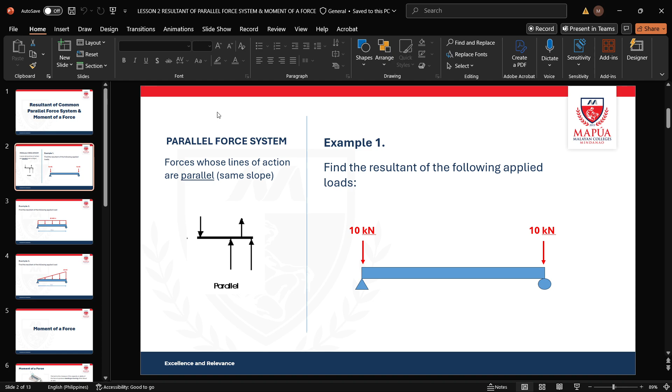So let's proceed to example 1: we need to find the resultant of the following applied loads. This is easy. If you have 10 kilonewtons here and 10 kilonewtons there, what's the combination of the two? You have 10 plus 10 equals 20 kilonewtons. Since it's symmetrical, the resultant will be located at the middle of the beam, that is 20 kilonewtons. This will be our final answer. Easy, right?

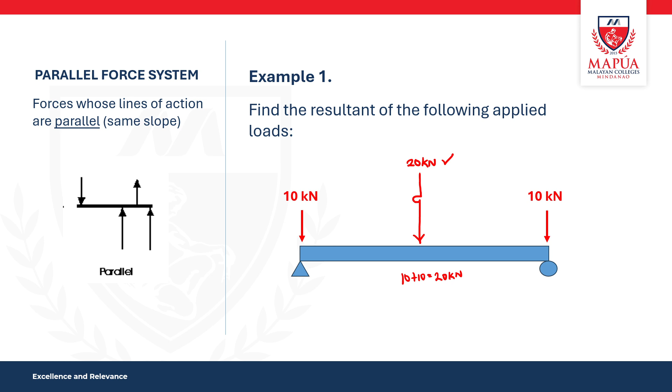So next, what if it's not a point load? What if it's a uniformly distributed load? This is what we call uniformly distributed load.

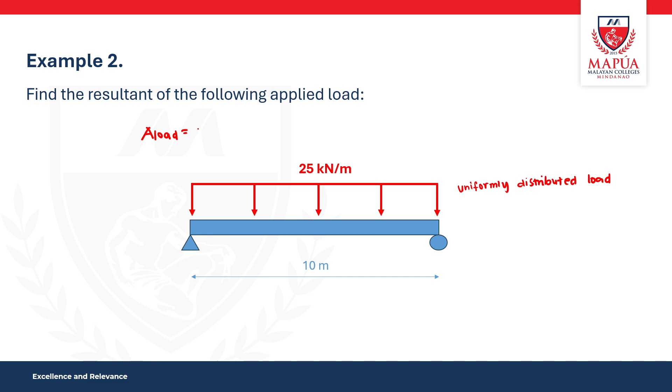So when it's a uniformly distributed load, finding the resultant is just the area of your load. What shape is this? A rectangle. So the area of that load would be the height times the length. Let's call this height, and this the length.

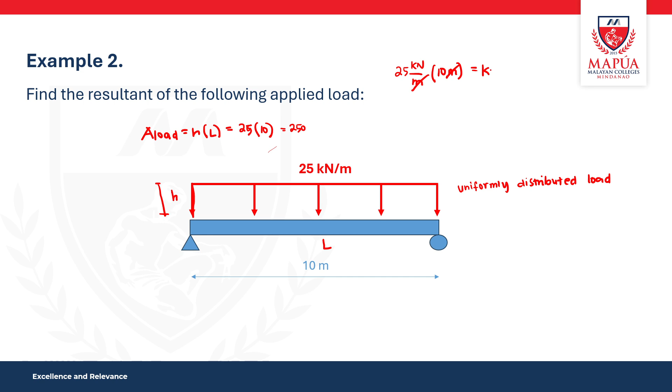So your height is 25 kilonewtons per meter, and the length is 10 meters. So that would be 25 times 10, this would be 250. What's our unit? In identifying the unit, remember that 25 is in kilonewton per meter, and 10 is in meter. Therefore the meter cancels, leaving kilonewton.

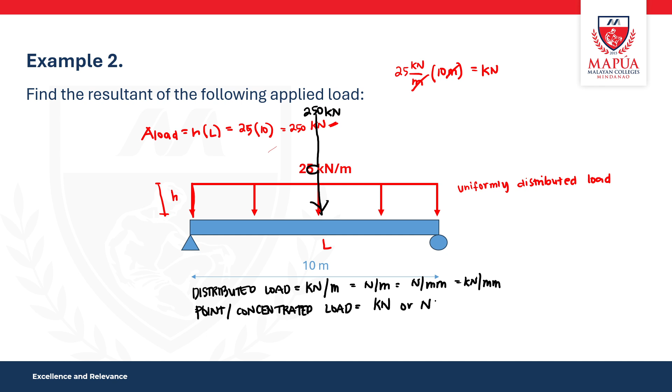the unit is in kN per meter. It can also be in newton per meter or newton per mm or kN per mm, as long as it follows that format. Then for point load, or what we call concentrated load, the units are in kilonewtons or newtons. So let's proceed to the next example.

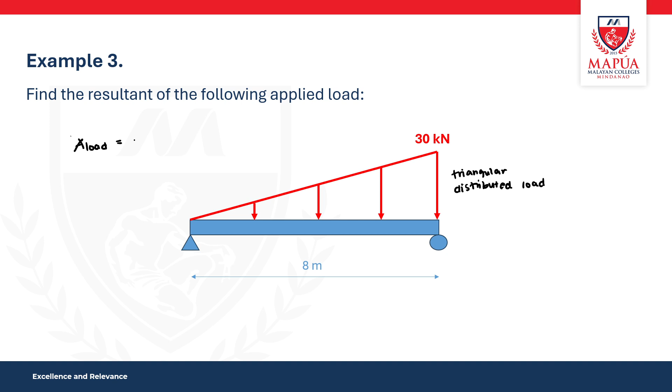You solve for the area of your load. So we will solve for the area of the load. What shape is this? Triangle, right? What's the formula for the area of a triangle? 1/2 base times height.

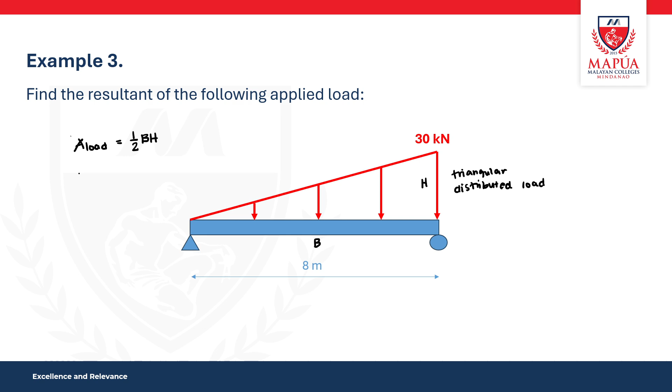In this case, this will be our base, and this will be our height. So the resultant is the area of the load. This would be 1/2 times base of 8 meters times height of 30 kilonewtons per meter. So the meter cancels. Therefore, your resultant is 120 kilonewtons. And this is our final answer.

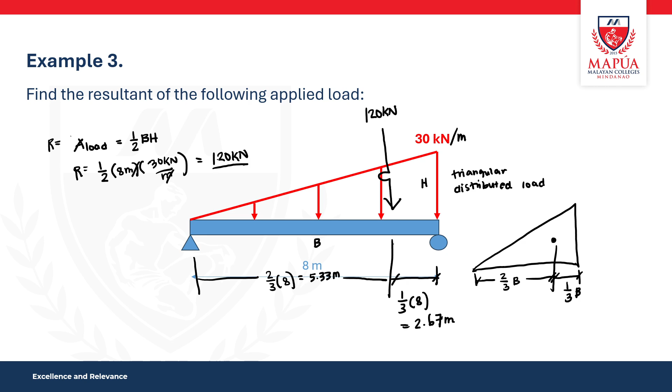So if dito na figure na to, ito yung ating moment center. And the perpendicular distance from the moment center to the line of action is called the moment arm. So if ito yung force mo, tapos ito yung moment center mo, di ba? Kasi about here siya, about here siya na point, iikot. Imagine mo lang kapag umikot yan ng paganyan, about here siya iikot.

And tapos, yung perpendicular distance mo, this one, this is called your moment arm. So, when you say perpendicular, ganito, right? This is perpendicular. Basics na lang man yan, so I hope you understand what a perpendicular distance means.

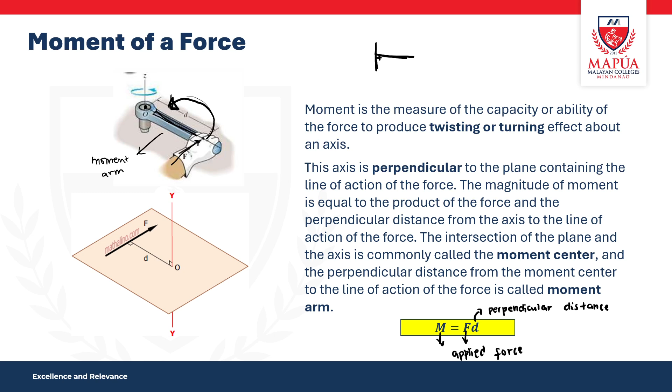So, yan yung ating formula wherein moment is equal to force times the perpendicular distance. So, yung F yung ulit yung ating applied force and D yung ating perpendicular distance. Yung units ng moment can either be kNm, Newton meter, or Newton mm. Basta take note lang na 1 kilonewton is equal to 1,000 newton.

So, for example, meron kang 5 kilonewtons. That can also be written as 5,000 newton. So, naging ganito yung unit niya kasi yung force natin, for example, in terms of kilonewton or newton naman yan siya, di ba? Times mo sa yung unit ng ating distance can be mm or meter. So, let's say naka-meter siya. Kaya ganyan yung kanyang unit.

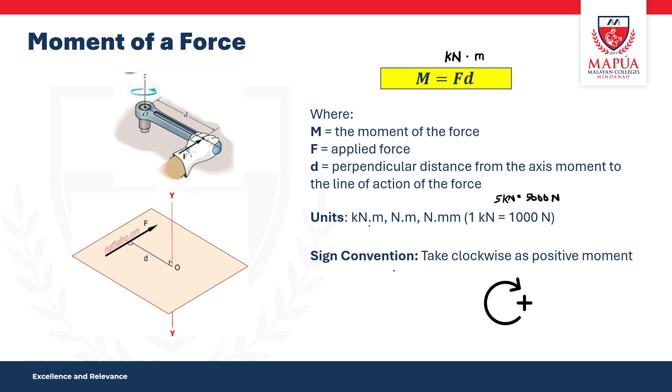And let's take our sign convention as clockwise positive. So, proceed agad tayo sa meron pa palang principle of moments. So, yung principle of moments, it just says that the moment of a force with respect to any axis or point is equal to the algebraic sum of the moments of its components with respect to the same axis.

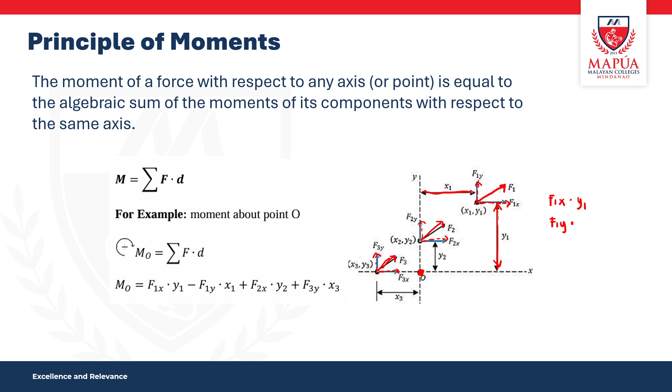Itong ating y1. How about naman yung moment ni F1y about point O? That would be yung force natin na F1y times, ano yung perpendicular distance niya? Ito, di ba? That is x1. So, mag-example agad tayo para mas magets natin.

Sige, for the first example, we need to determine the moment of force P about point A, ito, tsaka point B. So, let's solve first the moment about point A. That is, ano nga ulit yung formula? That is force times the perpendicular distance. Ano yung given natin na force?

Meron tayong 12 kilonewtons. And then, multiply natin sa ano yung perpendicular distance. So, if this is your point A, yung perpendicular distance ng force na to about A is itong 4 meters. So, therefore, yung moment natin about A is... Yung moment natin about point A is 48 kilonewton meter. This is our answer for moment about A.

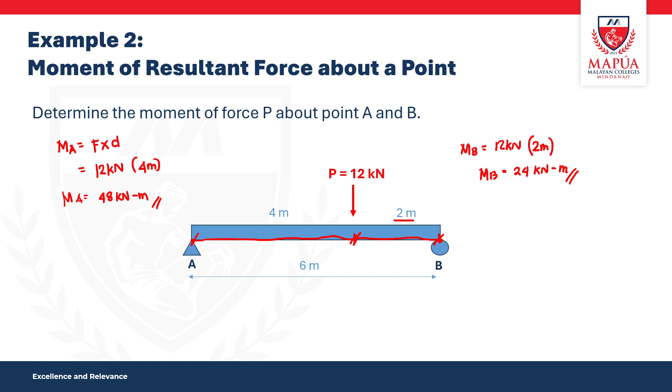Dali lang, di ba? Kailangan nyo lang talaga i-practice.

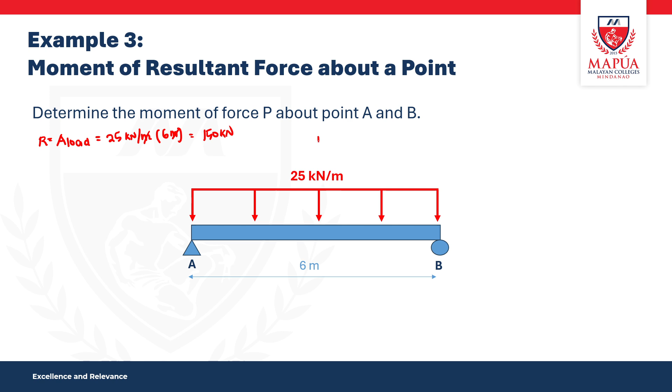So yung resultant mo, since symmetrical siya, meaning yung resultant mo is located lang sa gitna. So this is 150 kilonewtons. Tapos, yung distance na to would be, since symmetrical ulit, this is 3 meters. And this is 3 meters also.

So, ano yung moment natin about point A? Pwede na tayong mag-moment, diba? Kasi meron na tayong force, saka perpendicular distance. So, that would be 150 kilonewton. Tapos, yung perpendicular distance is kapag dito ka na bumoment sa A, ano yung distance niya patungo doon sa force mo? That is 3 meters. So, your moment at A is

450 kilonewton meter. Sa moment at B naman, ulitin lang natin, it is force times perpendicular distance. You have a force of 150 kilonewton times yung perpendicular distance niya if galing sa B until sa position ng iyong force, that is 3 meters. Yung moment at B mo is also 450 kilonewton meter. And this will be our final answers.

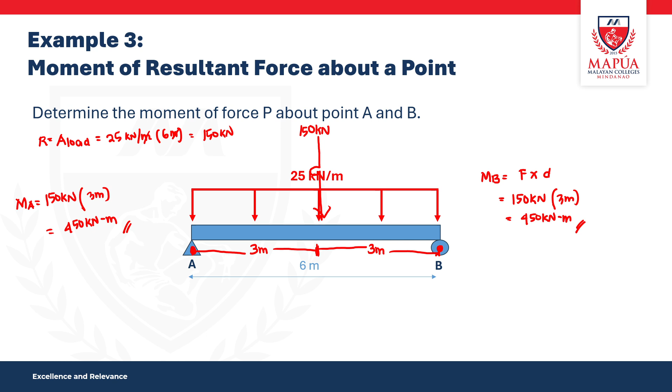So how about this naman? Mag-moment raw tayo about point A and B again. Ano ulit yung first na gagawin? You get the resultant of the uniformly distributed load. So that is just the area of the load.

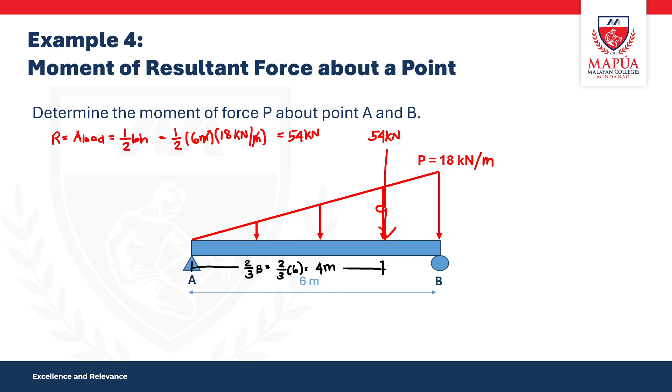Saan ulit nag-a-act yung ating 54 kilonewtons? Around here, di ba? Based doon sa ni-review or ni-recall natin na centroid ng triangle. So, if dyan yung centroid ng iyong triangle, ilan to? Ito ay 2/3 of your base, or that is 2/3 of 6. Nasagot. You have 4 meters. Ito, ano naman to? This is 1/3 of your base. And yung base mo is 6 meters. Therefore, ito is 2 meters.

So, meron kang 4 meters dito, tapos meron kang 2 meters dito. So, pwede na ba tayo mag-moment? Yes, pwede na tayong mag-moment kasi meron na tayong force, tsaka meron na rin tayong perpendicular distance. So, mag-moment tayo at A. Dito raw tayo na point mag-moment. Ano yung force natin? You have 54 kilonewtons and then yung perpendicular distance niya, meaning yung distance niya na perpendicular from point A until your load, that is 4 meters. So, your moment at A would be

216 kilonewton meter. So, this would be our final answer for moment at A. And then, yung moment at B mo naman, force times distance lang, di ba? So, yung force mo, you have 54 kilonewton. And then, yung distance mo daw, from B until doon sa force mo, na perpendicular distance ha, that is 2 meters. So, our moment at B would be, that is 108 kilonewton meter. And this would be our final answer.